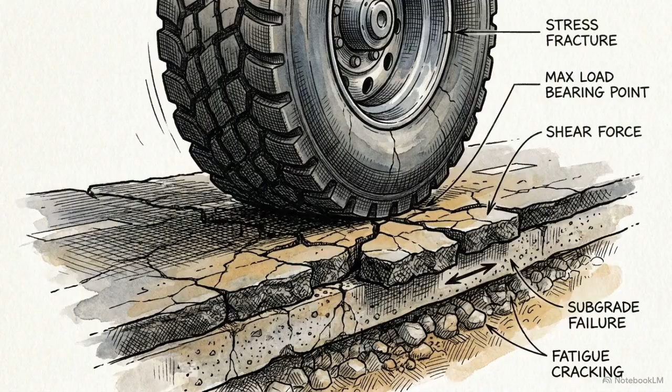Infrastructure is under constant assault. When thousands of tons of heavy freight roll over a highway, the underlying subgrades compress and settle, and the asphalt wearing courses crack and splinter under the stress.

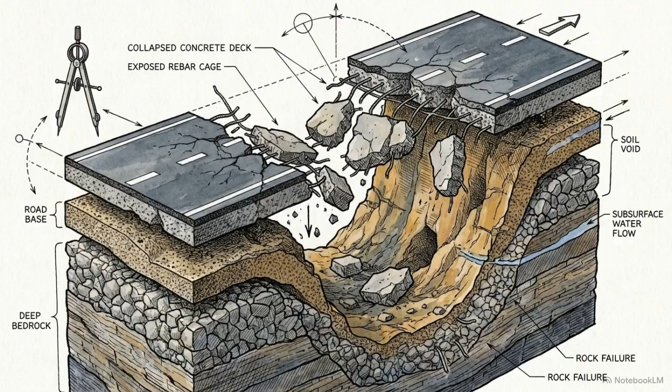A physical collapse is often a symptom of a systemic vulnerability. Governments, the principals paying for these projects, do not build roads themselves. They hire private contractors, the agents, to execute the work across vast, decentralized networks. This creates an inherent risk: the contractor's incentive to maximize profit directly opposes the government's need for high-quality, durable materials.

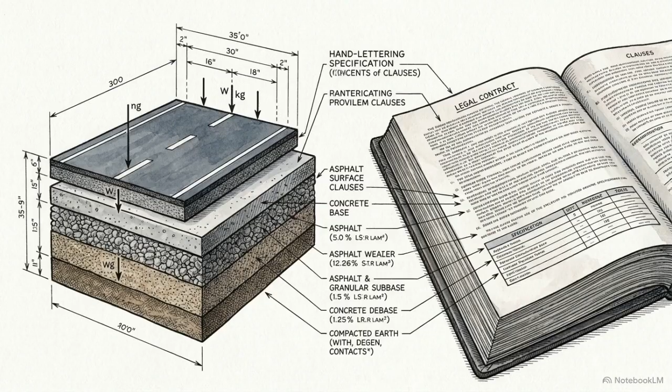Structural engineering provides the physical design, but contractual engineering ensures the contractor follows it, writing rules so tight that cutting corners becomes mathematically and logistically impossible. To see exactly how this is done, we look at two blueprints: the National Guidelines for the Pradhan Mantri Gram Sadak Yojana, India's massive rural road network, and the specialized tender documents from the Madhya Pradesh Public Works Department.

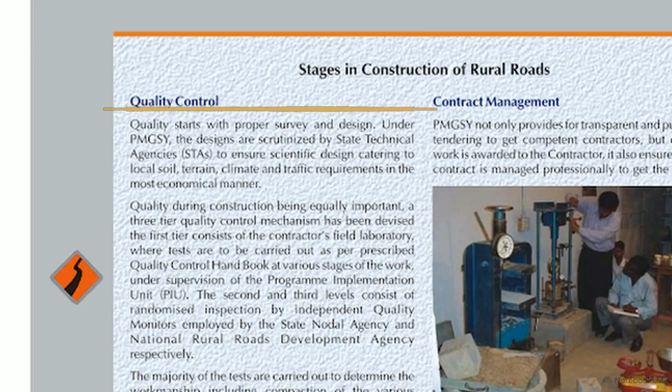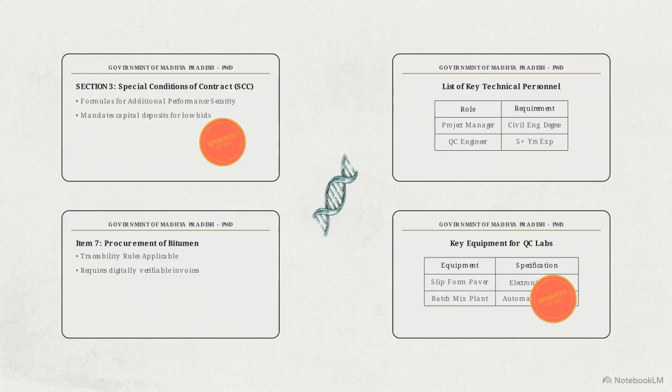The operational philosophy of the PMGSY is printed directly in their quality control handbook. Building a road requires relentless testing and merciless quality control. To understand how a highway physically survives, we have to reverse engineer the legal procurement DNA designed to constrain the contractor who builds it. Deploying tens of thousands of kilometers of paved roads across remote rural geography introduces a massive logistical blind spot.

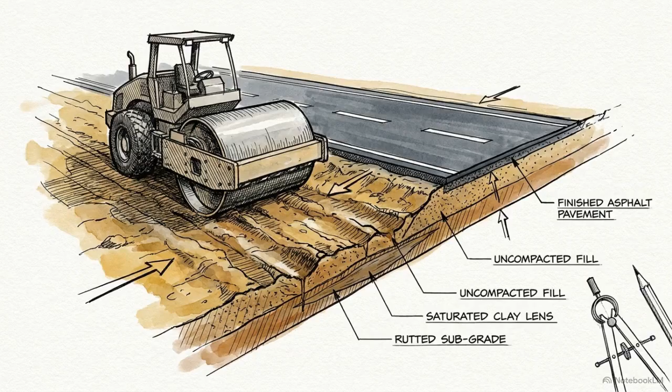A state engineer cannot physically monitor every shovel of earth or pour of concrete. To close that blind spot, states deploy formal tender amendments. This document from the Madhya Pradesh PWD modifies standard conditions of contract to impose strict quality assurance metrics on road and bridge works. Manual oversight relies on trust, and at the scale of a statewide infrastructure grid, trust is a failure point. If a supervisor looks away, a substandard layer gets buried forever.

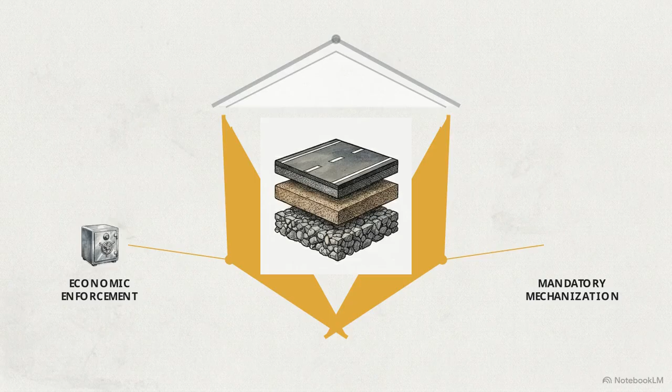The state replaces trust with a contractor constraint matrix. This is a system of administrative barriers, economic enforcement, mandatory mechanization, and intense on-site verification that lock into place over every physical layer of the road. The tender document effectively translates the laws of physics into a series of non-negotiable legal prerequisites.

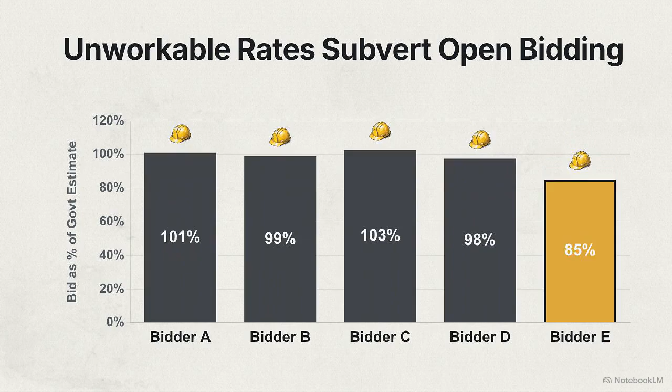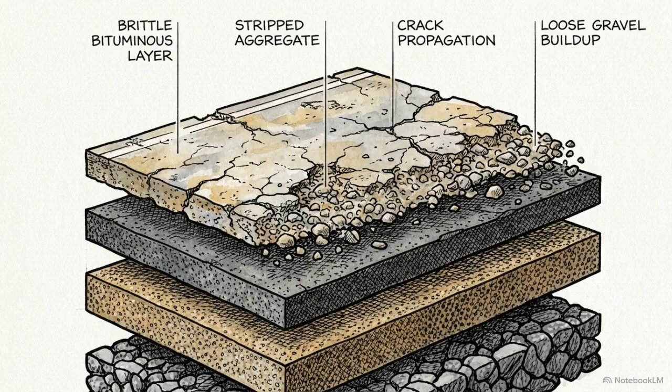The first layer of this matrix stops systemic risk before a single piece of equipment arrives at the site. In open bidding, contractors often deploy a strategy of quoting unworkable rates. They submit a bid so aggressively low that they win the contract, but physically cannot build the road to specification without losing money. Their plan is to recoup their profit margin by secretly stripping out material quality.

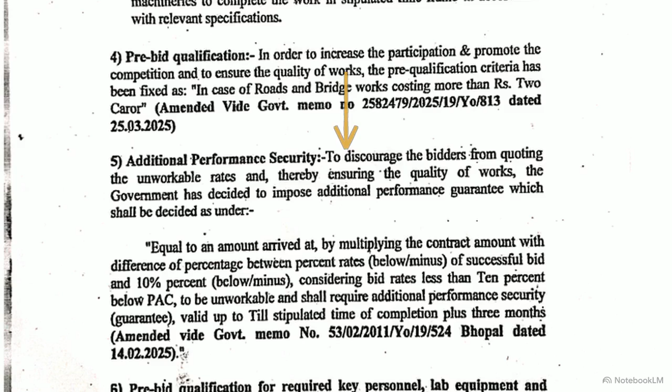To neutralize this, the government inserts an economic hazard. Item 5 introduces an additional performance security. The math works like this: if a contractor's bid drops more than 10% below the probable amount of contract, the state flags it as unworkable. The state then calculates the exact difference and forces the contractor to deposit that amount as an upfront performance guarantee. If you want to bid artificially low, you have to lock up your own working capital to cover the gap.

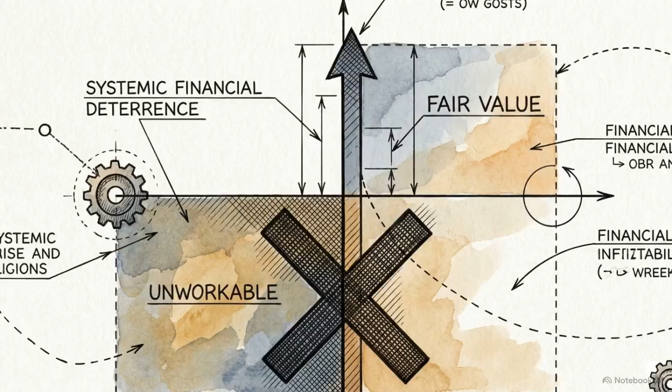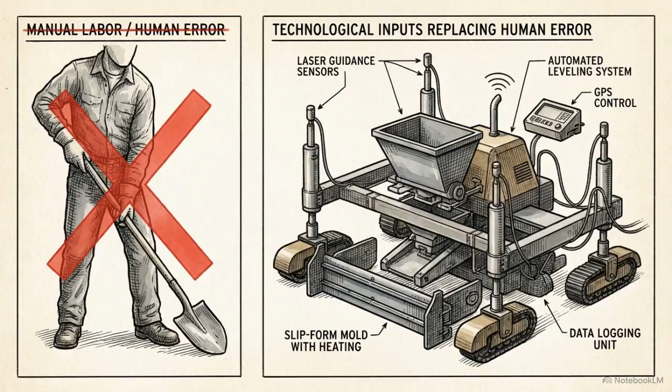By eliminating the financial advantage of an unworkable bid, proactive economic deterrence acts as the invisible first structural layer of the road. Once the contract is economically secure, the matrix moves to the execution layer. Humans get tired, lose focus, and make uneven measurements. For critical pavement laying, modern state specifications explicitly reject manual labor. They demand specific technological inputs instead.

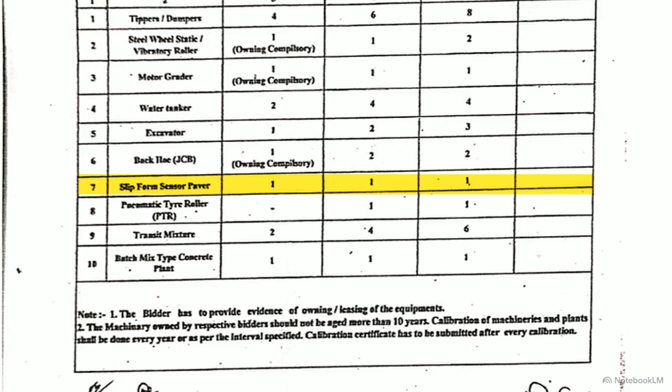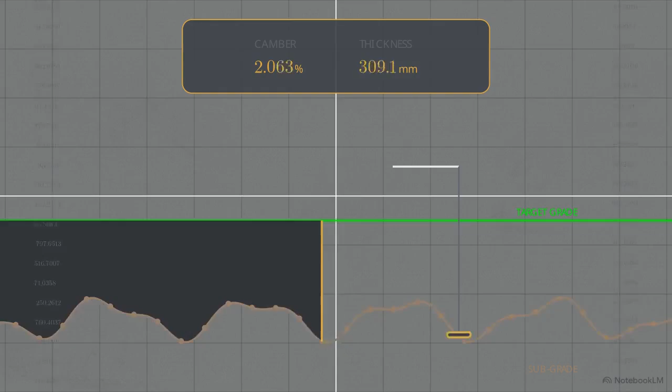Look at the equipment requirements for concrete roadworks in the tender. A contractor is legally required to use a batch mix type concrete plant and a slip-form sensor paver. A slip-form paver equipped with electronic sensors reads a physical string line or digital model to extrude the concrete. It calculates and adjusts the camber and thickness thousands of times per minute, far more reliably than a crew with hand tools.

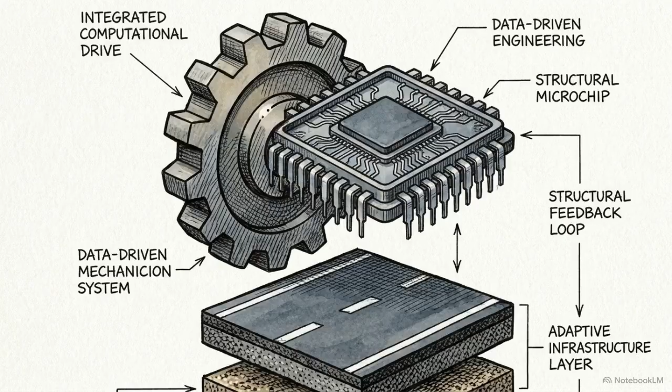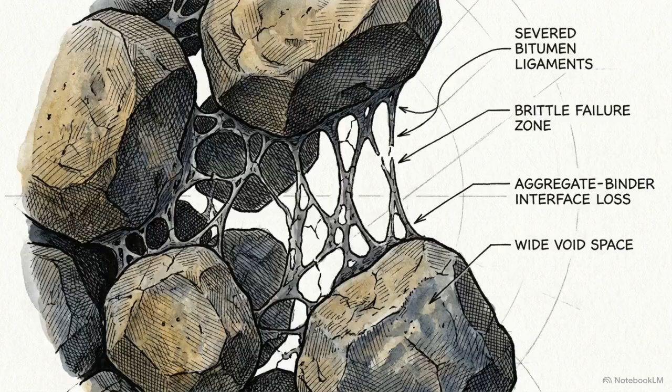By mandating computerized machinery right inside the legal tender document, the state neutralizes the variable of human error on the job site. Perfectly leveled concrete and asphalt will still fail if the raw chemical inputs are compromised. If a contractor uses untraceable, diluted, or low-grade bitumen, the binder will fail to hold the aggregate under thermal stress or heavy traffic. To force traceability, Item 7 requires contractors to source bitumen exclusively from domestic public sector refineries.

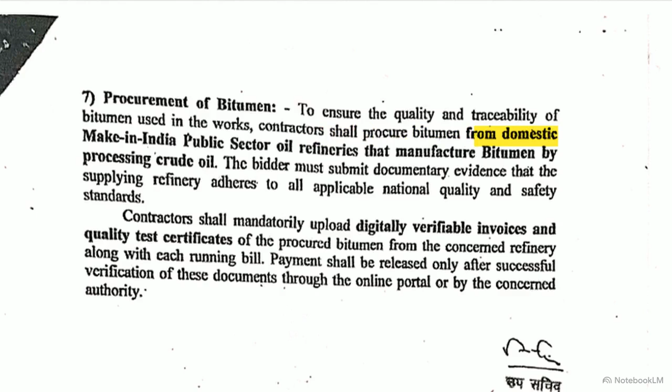They tie this directly to cash flow. Contractors must upload digitally verifiable invoices and quality test certificates with every running bill. Physical material integrity is rigidly enforced through a digital financial gate. If the chemistry isn't proven, the payment is blocked.

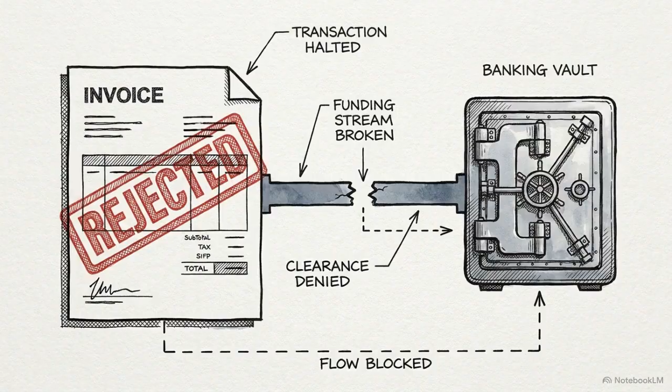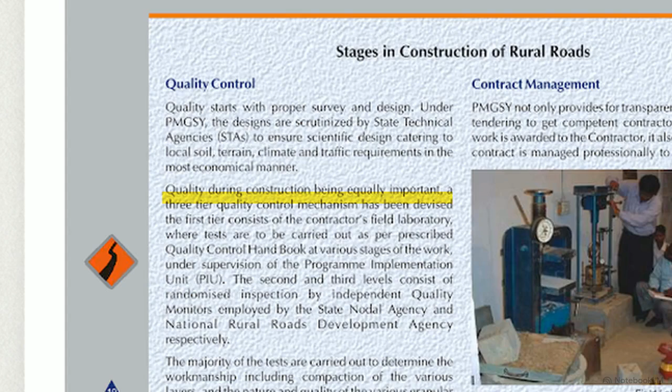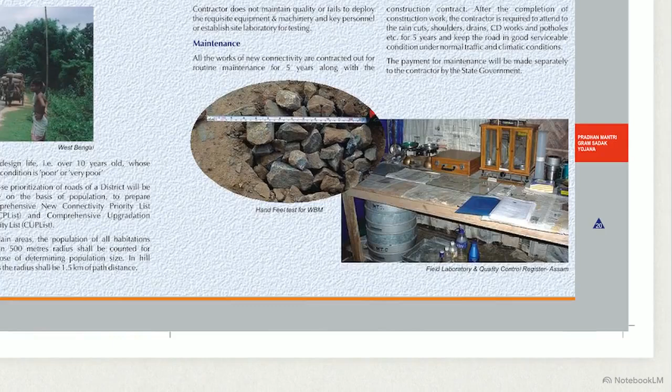The final, most exhaustive layer of the matrix involves verifying that the executed work actually matches the design standard. The PMGSY framework outlines a three-tier quality control mechanism. State and national quality monitors conduct randomized inspections, forming the second and third tiers. But those external audits rely entirely on a continuous stream of data from Tier 1, the contractor's own mandatory field laboratory. This tender annexure explicitly defines the minimum acceptable scientific capability for that field lab.

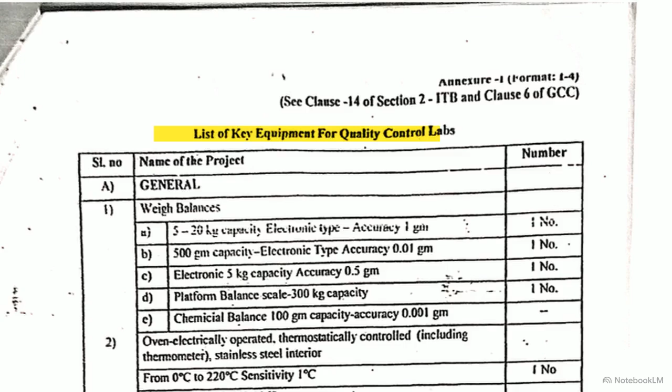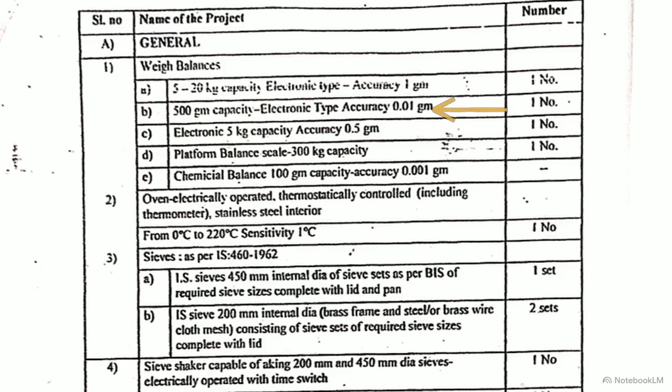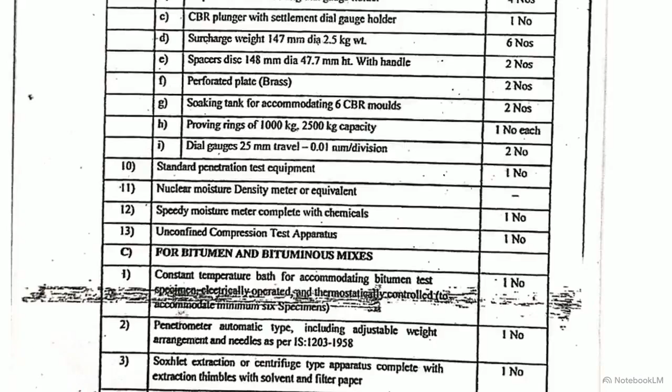Under the general category, contractors must possess electronic weigh balances accurate to 0.01 grams, thermostatically controlled ovens, and standardized sieve sets. To prove soil compaction, the state demands specialized equipment, like a California bearing ratio apparatus with a 5-ton load frame. To verify chemical properties, they must deploy penetrometers and soxhlet extraction equipment for binder analysis.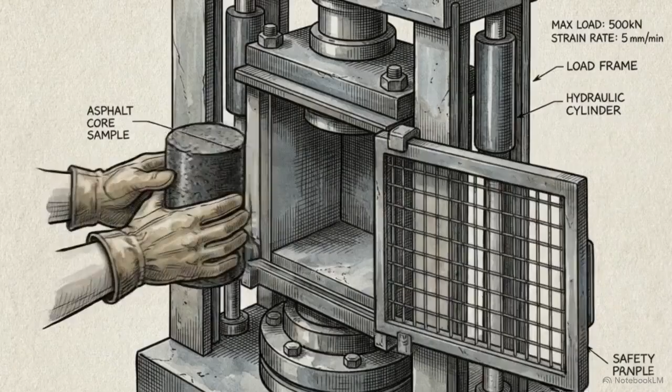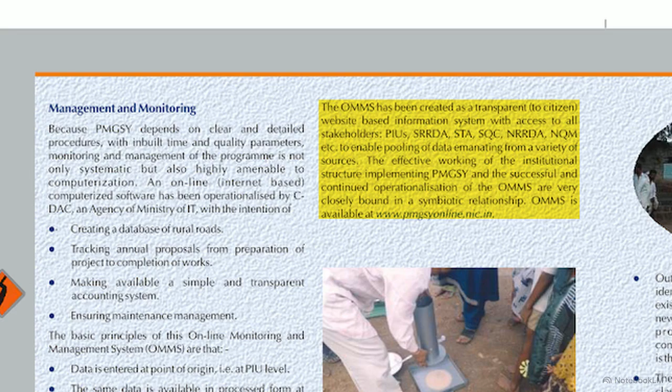Generating scientific data in a remote field lab creates an administrative challenge. How does the central government actually review thousands of localized tests? They ingest it into a centralized digital infrastructure. The PMGSY utilizes the Online Monitoring and Management System, or OMMS. Data is entered at the point of origin. Test results from the field laboratories bypass local paper bottlenecks and are uploaded directly into a transparent database.

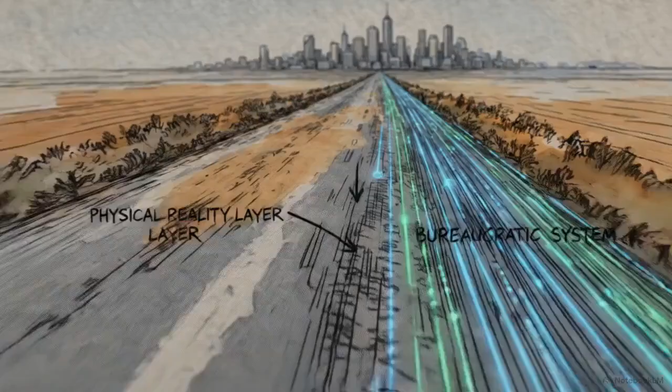This pooling of data allows state and national agencies to track real-time quality metrics across thousands of independent work sites simultaneously. The OMMS functions as a digital nervous system, bridging the bureaucratic rules in the capital with the physical reality in the dirt. These three systems, economic deterrence, mandated mechanization, and localized scientific verification, form the core of the constraint matrix. True structural engineering at scale relies entirely on ironclad contractual engineering.

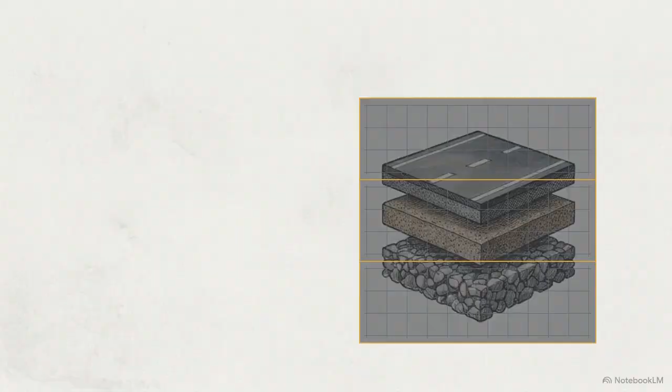A durable public highway represents the physical output of a multi-tiered bureaucratic algorithm, translating rows of equipment tables into stable layers of pavement. Every physical layer of that cross-section is held together by the legal clauses that demanded its perfection. Mastering the principal agent problem through systems engineering is the only way to build enduring public infrastructure.